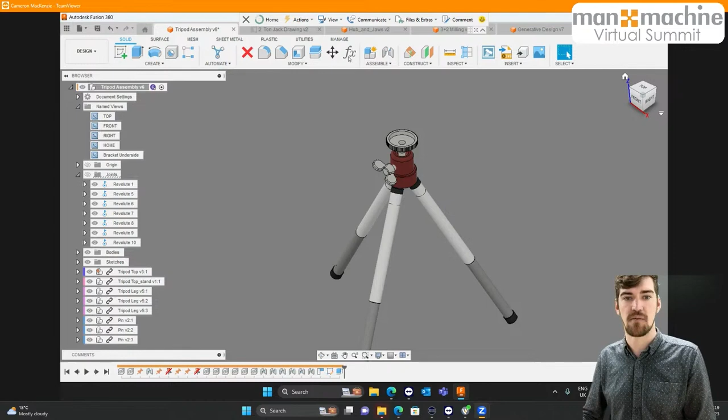We'll start off inside the main environment within our design environment. We've got a few really nice bits of functionality added in over the last few updates. The first one is inside our parameters—we now have the ability to defer updates. So we can basically create a whole lot of updates immediately without them being pushed through to the rest of our model. We've got the ability to change any parameters we might need to adjust, and then push those out as an update all at once at the end.

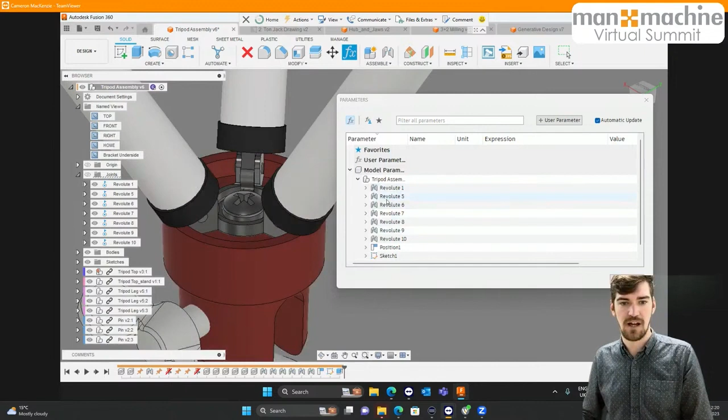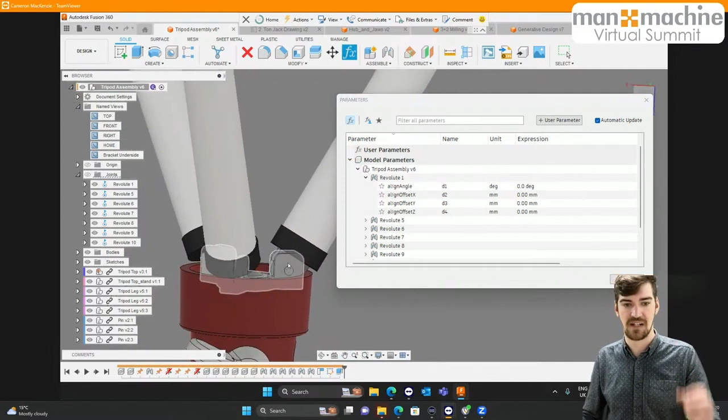So let me grab this window and show you—I'll go to another view and drag the model off to the side, and we'll look at the underside of this bracket over here. We've got a model with different parameters in this list, and we've got a revolute joint that I want to make an adjustment to, so we have an offset. If we're wanting to make adjustments going forward, we want to look at the geometry itself—we've established that in this model, these legs at the bottom and the way they're connected collide with the main frame itself. So we've got the ability to make adjustments to either the angle offset or the X, Y, and Z offset from inside the parameters itself.

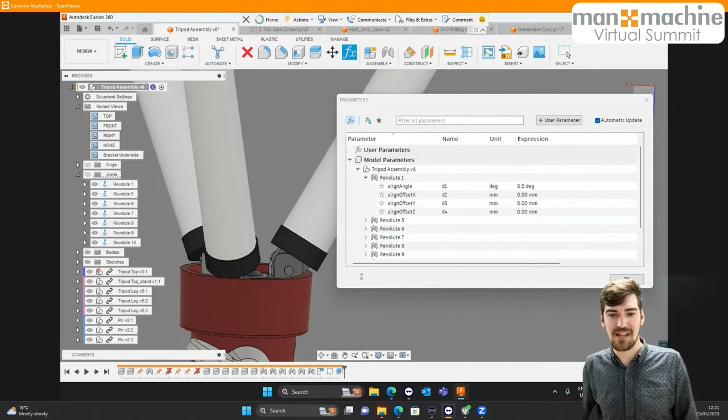Let me just adjust the table so you can see me a bit better. So we've got a Z offset that we have the ability to adjust from inside the parameters table over here. And as I say, we've got the ability to adjust these parameters without it automatically updating inside the model. So if I deselect automatic update from the table and make the adjustment to our parameter, I can come in and say I want a -7mm offset on the Z offset of that alignment. Now you can see as soon as I've hit enter, nothing has changed.

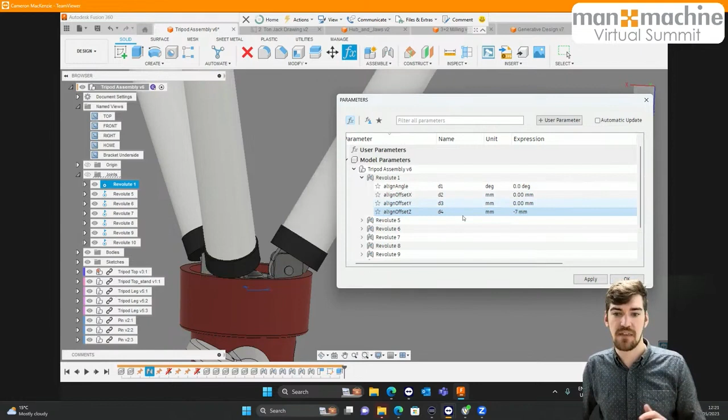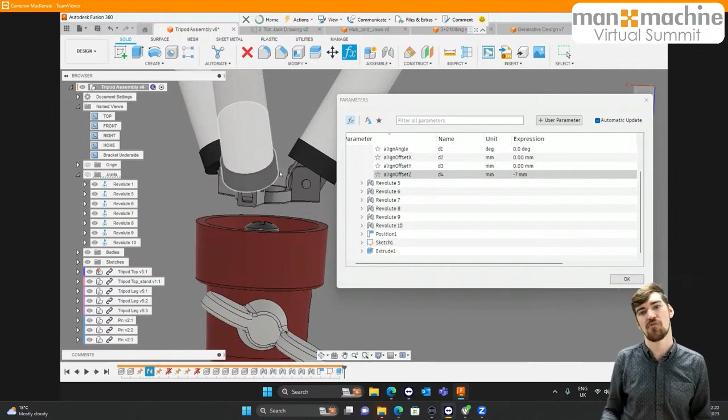I could go in and make any adjustments to any other positioning, any other parameters inside the model itself, and only once I'm ready for those updates to occur will I then hit apply, and then those changes are being made—it will tell me they're being applied at this moment in time. And if I hit apply, you can see how that has now made that adjustment. So nothing too new with regards to parameters, but just the way we deal with them and how they automatically update inside the model space, which is great when you have a few conflicting parameters that have been difficult to adjust previously. We've now got the ability to defer those.

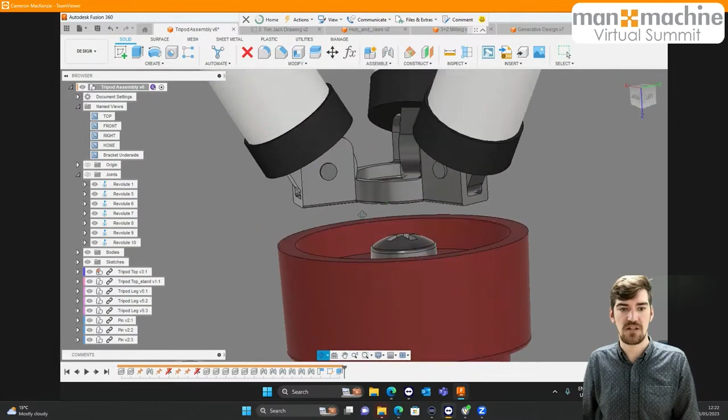I'll hit OK on there now, that's the only thing I need to do inside of the parameters itself. Today I just want to have a look at one of the other really great tools that have been introduced over the last while.

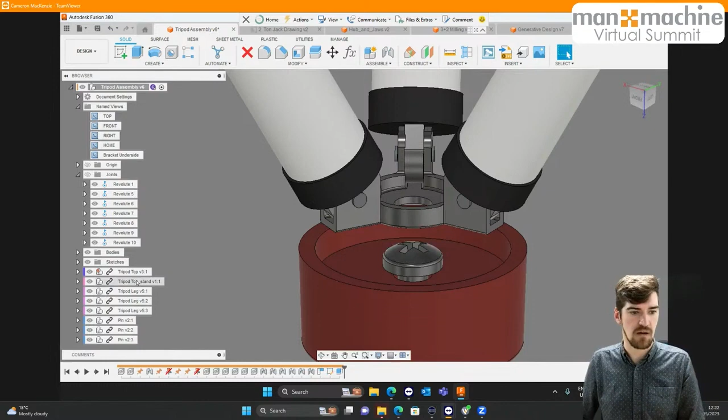So what I want to do is just readjust now. We've repositioned these legs to where they would need to be. I just need to go and remove the visibility of the existing stand in there. We've got a few components that we want to be connected to in one of these tripod legs. I think it was this one here, let me just double check. We've got a pin which is in here.

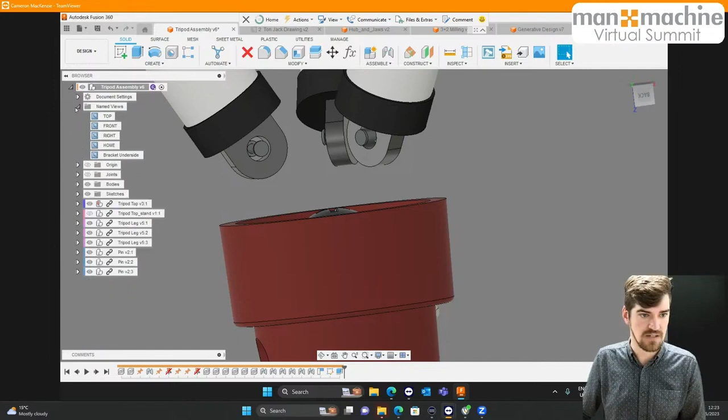Let me just push these away ever so slightly so I can see the screen a bit better. We've got a base down here at the bottom that we're wanting to connect our part to. So in this tripod over here, I'm just going to enable the visibility of these two rings that I want to connect to. I've just done that inside of their models themselves, just for the ease of use on that one.

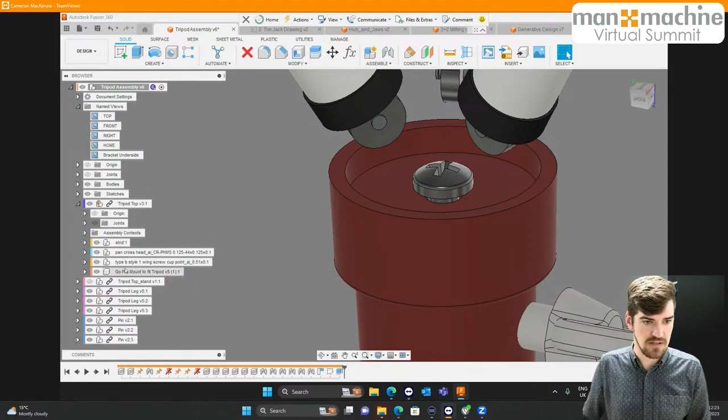Then within my current active model, this one over here, I should have a part, not in there apparently, in one of the other subcomponents I should have a leg. Doesn't matter too much for the sake of this one, I don't have it there, it's fine. I'll just create a quick sketch on here and just generate a new model from there.

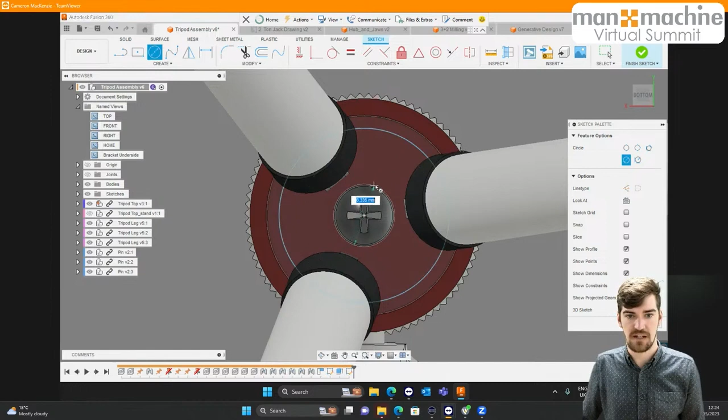So wanting to connect just this one leg, we will then create a pattern of it around the rest of the component. So just wanted to connect that leg to the base over here. I can come in and quickly create a sketch, something like that, and something like that, maybe a little bit smaller on there. Normally I'd try to be precise, but in this case I'll just go and create a line, something like that.

And another one like that, and just create an angle between these two. I didn't want a horizontal constraint on there, let me delete that very quickly.

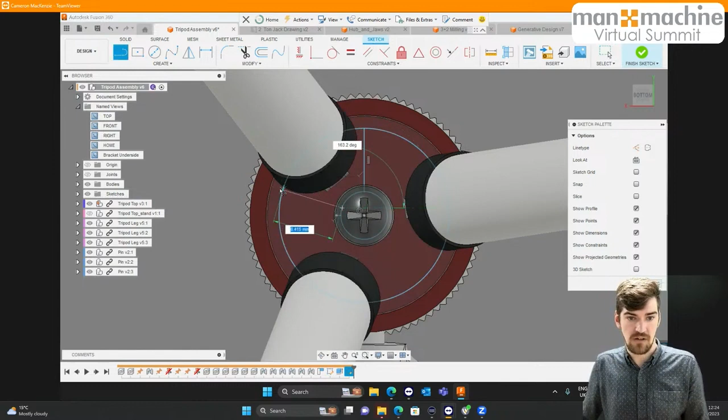And we can go and create a line, something like that, and dimension between those at 120 degrees. Or do we need 60 degrees? Let's go for 60 degrees on this one, something like that. We'll make it do as it is. So I'll hit finish sketch on there.

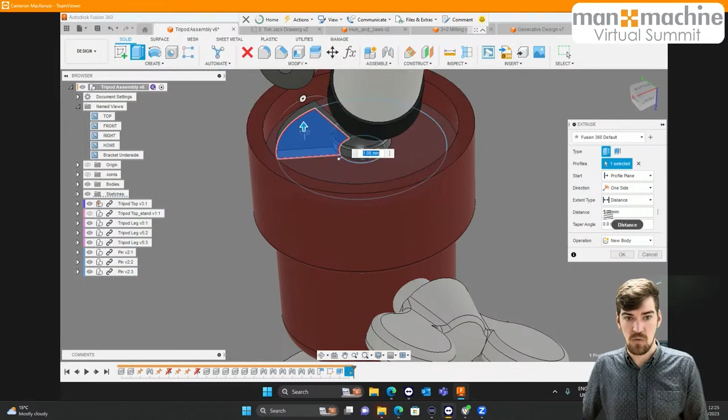Just extrude that out ever so slightly, I think I've got about a 1 mil extrusion on there, and I will create it as a new body on here. So basically we want to be able to connect the base that's connected to the bottom of the stand itself to the legs over here.

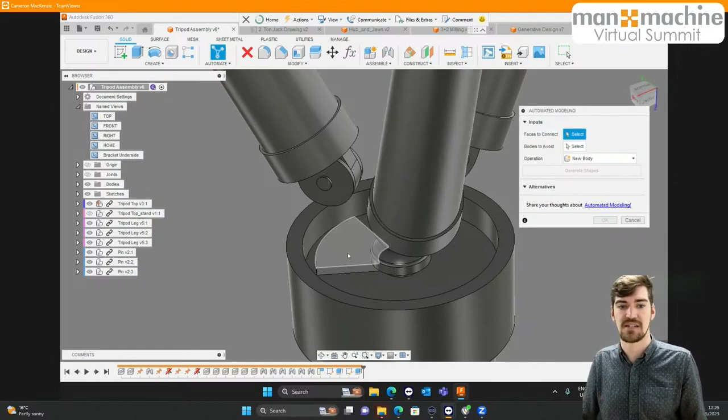Using automated modeling, we can essentially tell Fusion that we want to connect surfaces together, and Fusion can then generate the model that comes along with that. So as soon as I enter the automated modeling environment, I get a prompt to ask me which faces I'd like to connect. In this case, I'll go and grab the top face of that model that I just created on there.

I'll then also select the outside faces of the rings that I want to connect to my legs themselves as well. And then we've also got the ability to add in bodies that we want to avoid. So again, those of you familiar with generative design inside of Fusion 360 will be familiar with the options we have available here. But you can see it's really simple, we're just saying the areas that we want to connect and the ones that we want to avoid.

Once we've got that selected, we can then hit generate shape. This will then go off and start to generate those shapes for us. This will give us a max of about 6 alternatives that we can use, and those alternatives are then broken down into two subsets really.

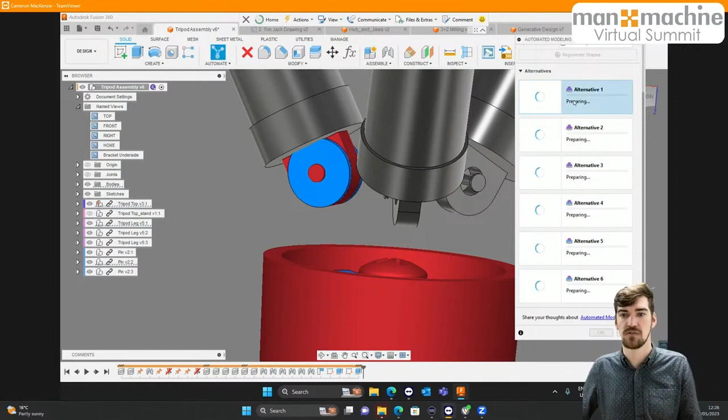We've got smooth connections, which are the first three, and we've got sharp or squarer connections, which are the bottom three. As they start to generate, you'll notice that alternatives 1 and 4, as well as 2 and 5, and then 3 and 6, work in much the same way and look similar in shape, but between the three groups we'll have very different shapes.

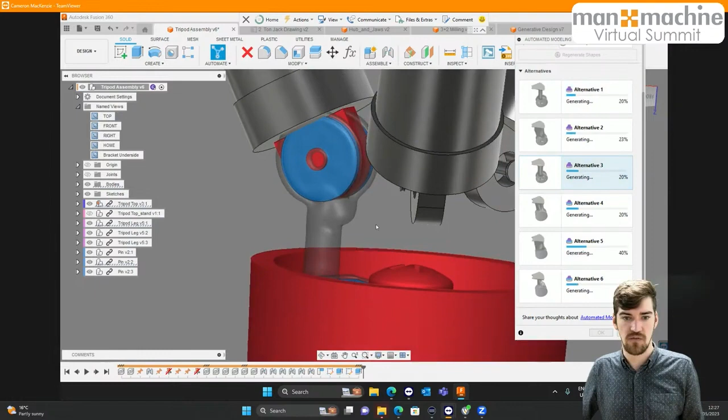Once these start generating, I'll give a preview. You can see alternative 3 has a very specific shape off to the side over there. If I look at alternative 6 in this case, it's got a similar shape.

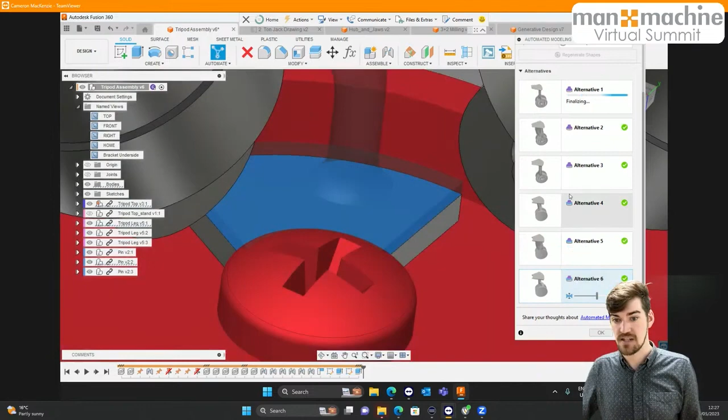But the main difference between these two is we've got sharper edges on alternative 6, with sharper corners, whereas alternative 3 has smoother blending into the original surface, the shape we chose from there. From here we can compare the different results we're getting.

So in this case I've got alternative 1, which actually looks quite similar to 4, but then I've also got alternative 2, and again alternative 5 will look very similar to alternative 2. Never thought I'd be saying alternative this many times this morning.

Afternoon already. The other option we have now, introduced fairly recently on top of the rest of the automated modeling, is the ability to adjust the thickness of the model itself. Using this little slider, we can make the material a little thicker or a little thinner, adjusting the slide from there.

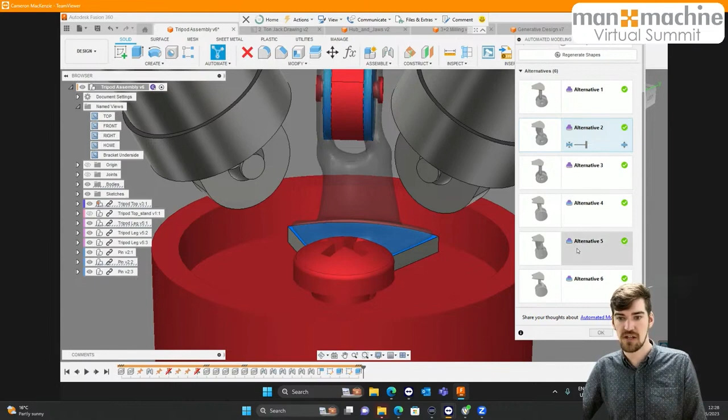Once we've decided on the one we want, it's just a case of hitting OK on the dialog box. I might want one with a sharper transition, especially if I'm trying to pattern these around - I'd want sharper edges on the side, just to make sure this is going in correctly.

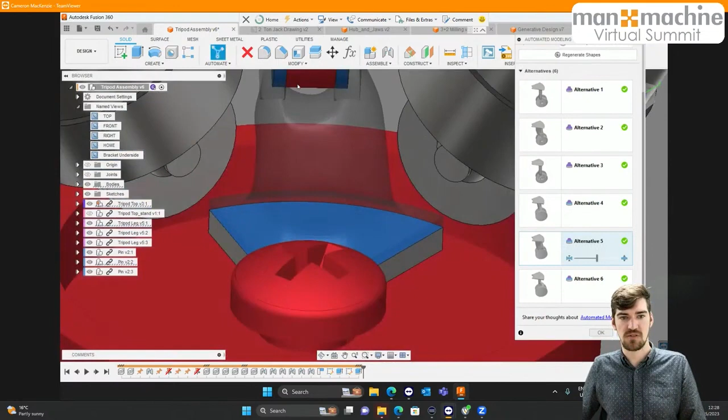One thing that's interesting to note here - I mentioned earlier I didn't get the model or the extrusion lined up in the greatest way. There isn't proper symmetry in how it connects to the bottom plate, and you'll notice the model has actually taken that into consideration. It's got more surface area on the right hand side to connect with, and that's why we got a bit of a lopsided model.

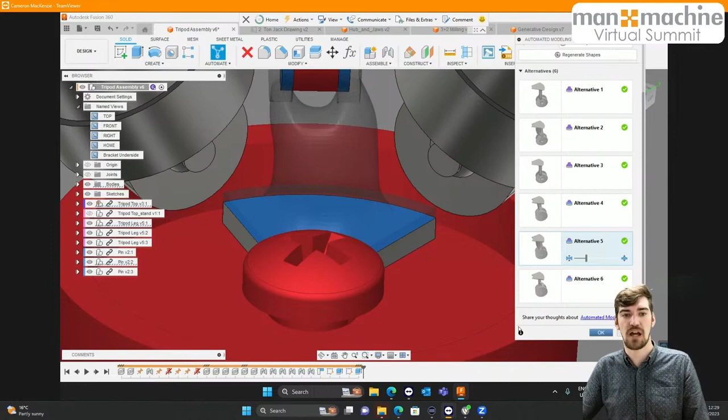But as soon as I'm happy with that and I've chosen the thickness I want for the component, I can hit OK. It'll then go and generate that as a 3D model that I can make adjustments to if I need to.

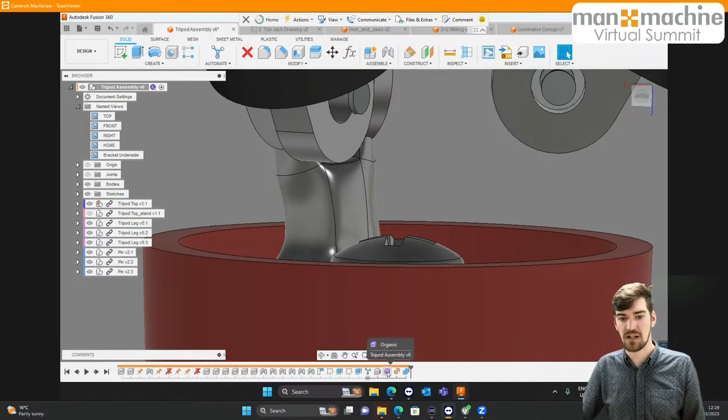So you can see we've now got this model perfectly made inside here, including the geometry that I told it to. We've now got that in the timeline at the bottom - the automated model feature that's been created, plus some preserves, and an organic model over here, which is basically a T-spline model.

I can go in at a later point once that's been created and edit that T-spline model. So if there are any features you wanted to tweak ever so slightly, any surfaces you might want to adjust, or regions you want thinner than others, we've got the ability to use our normal T-spline or form modeling to make those adjustments.

So if I double click on any of those edges, I can go and modify these, where I can then go in and grab the correct coordinate system. World space looks right, fine. I can then go in and scale that if I wanted to.

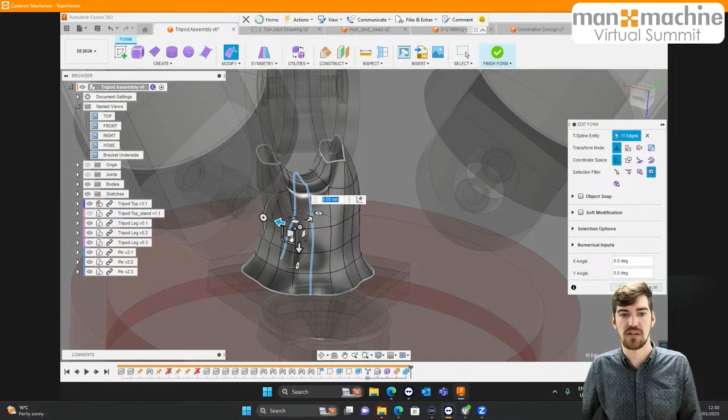I can move this around and adjust it to my heart's content. I can make certain areas a little bit smaller, maybe shift that down just to stretch the model a bit. I might want a little more of a gap along that region, so I can scale that down in just one region, maybe even from the beginning.

Any adjustments I make, as soon as I hit OK and go back into my 3D model, if I finish form here, that's then the adjustment to the model itself, to the actual feature itself.

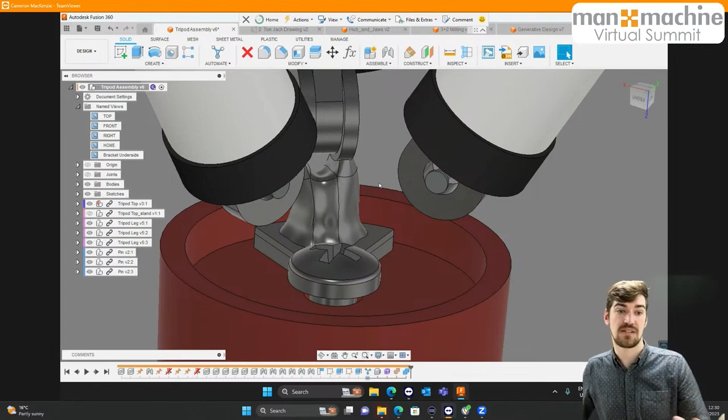So that's within the modeling environment or the design environment. The other updates we have are in the drawing environment. Fusion have done a lot of work in creating a lot more functionality inside of the drawing environment. We've seen a huge leap forward over the last 12 months, even the last 18 months or so, but there's been a really big jump in the last little while.

Some of the features we've got available now are the ability to copy an existing sheet across. So if we've done a lot of work on a particular drawing sheet but just need a few small things tweaked, we don't necessarily want to change the original one, but just want to make a few minor tweaks. It's a case of having multiple different clients that need different information, or different manufacturers that need little bits of information slightly different between them. So we've got the ability to right click on any of these sheets now and duplicate that sheet, and it's going to create an exact replica of the original one for us, where we can then adjust this to our heart's content and make any changes we want to our model.

Perhaps we don't necessarily need a full bill of materials on the model. We might want different views of the model, or just want to show a few separate components and change anything from there, but we want to keep the main feel of the drawing exactly the same and have them a little bit more identical in that regard.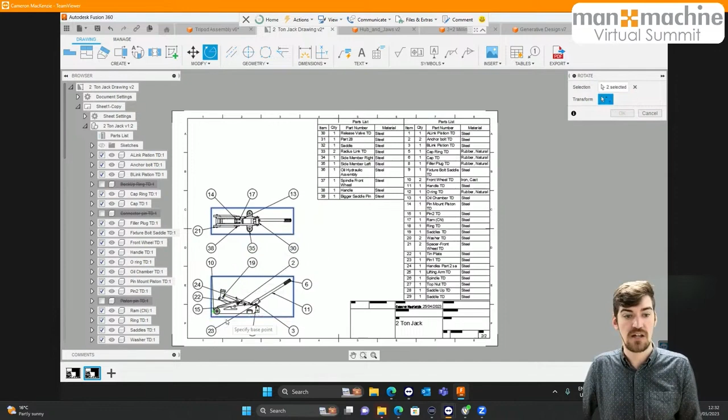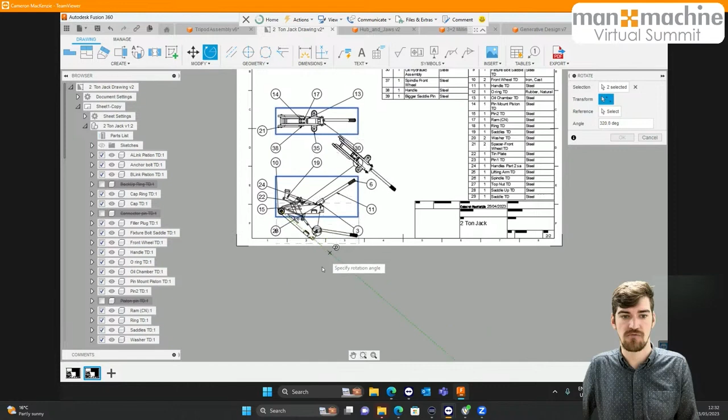I'll go back to the original one, and this is probably one of the biggest changes they've made inside of the drawing environment. I think they released it towards the end of last year, the November or December update, and that is the adjustments to the document settings. So inside of document settings, we used to have a few options, I think 3 or 4 options in the way we could configure the document as a whole. But that setting has gone through a complete overhaul.

So now if we go over the document settings in our window and grab onto the little cog to change the document settings, we get an entire window of different settings we can actually adjust inside of this particular document, including the font we're using, the text group, the text height, so whether we're using small, medium, large or custom. You'll notice as soon as I choose between any of those, the smallest text height then changes, and so do all of them incrementally adjust.

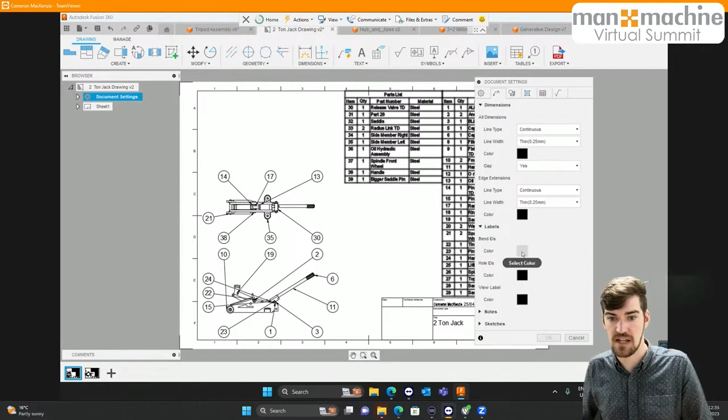On setting those colors, we then have the ability to choose any color that we want for any of the features, so whether we want to really highlight a particular feature or dimension inside of our drawing. For example, if I go and find labels - it's down in the table setup - we've got the ability to change the balloon color. So if I wanted a really bright pinkish color, I've got the ability to set that on my drawing. As soon as I hit OK, those will update inside of the drawing view.

But what happens if we've got a whole lot of other drawings that we've already done all the work to? What happens if we want to create a template for this? This color configuration can be set inside of the template file itself in your drawing templates. But Fusion has also allowed us to grab those settings and bring them in from a template file as well.

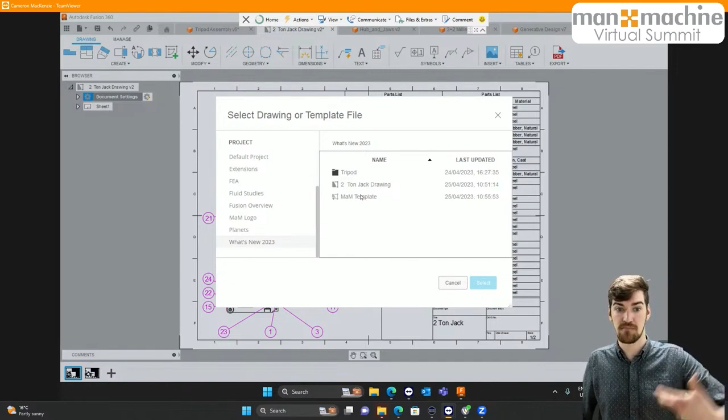If I right click on my document settings, I can actually go and import document settings, meaning that any drawing I've configured and done all the hard work in setting up, making sure all my color schemes are correct and everything is nicely configured, I can grab that from my data set. Here I've got a man and machine template. I can select that, and as soon as that updates, I hit OK. Now it's gone in and changed all of those settings in the document settings. As soon as I hit OK, I can push all of those settings onto this document.

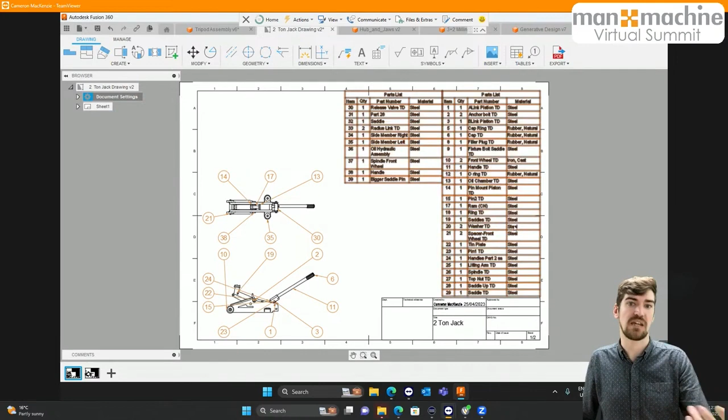So any existing drawings we have, we can import those settings onto this particular document. And then going forward, we're only using the man and machine template to make sure we're keeping up to our company standard along the way.

And then the last update in the drawing environment that I'm really excited about, released in the last release or the one before, is we've got the ability now to use automatic hole center marks as well as center lines. We can do that from inside of the view itself, when we place our view down or when we're editing a view.

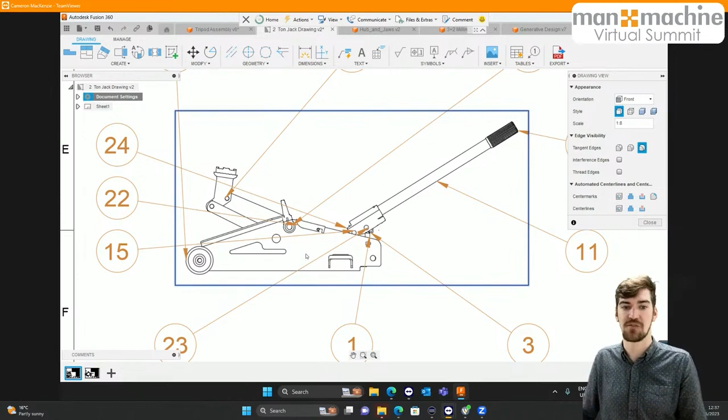If I just double click on the view itself, we've got the ability to go and grab center marks and center lines based on the type of geometry that was used to create that particular feature in the view. So it's going to look throughout our entire view and automatically populate the center marks or center lines based on the type of geometry we've created.

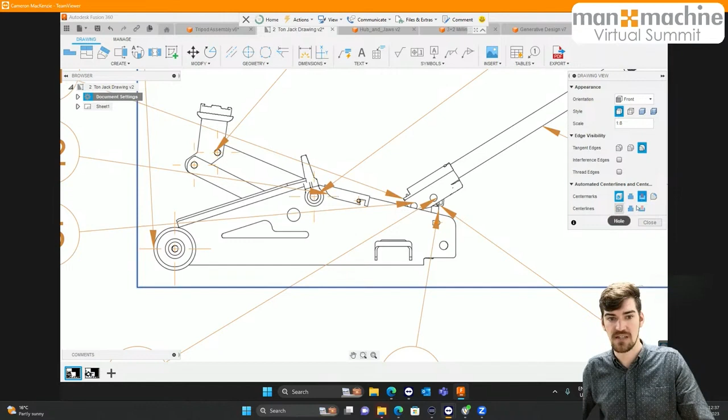So in this regard, I could go and grab center marks for any hole created in this model. In this case there aren't any holes - I believe these were all created using cuts. So as soon as I filter by cuts, we automatically go in and mark all of those center marks out. If we had any corner rounds, we could add those in, and any fillets, we could also add center marks to. When using those, we've got the ability to choose a minimum fillet radius and a maximum fillet radius, so we can filter those down really nicely.

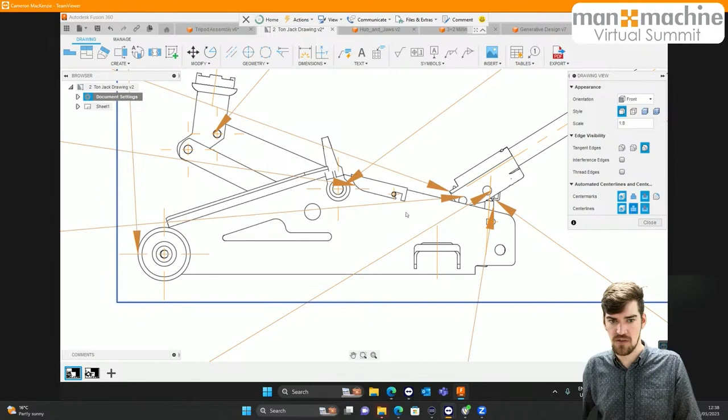We've also got the ability to grab center lines. So if we have any holes cut perpendicular to our view - in this case I don't think I had any on this particular model from this angle, but if I grab it from the other view, let me close this one down and edit this one - you can see as soon as I go and grab either from holes, extruded shapes, or cuts, we've got the ability to automatically mark those center marks in there. And again, those center lines and center marks are grabbing the new color and new configurations we've got inside of the drawing environment.

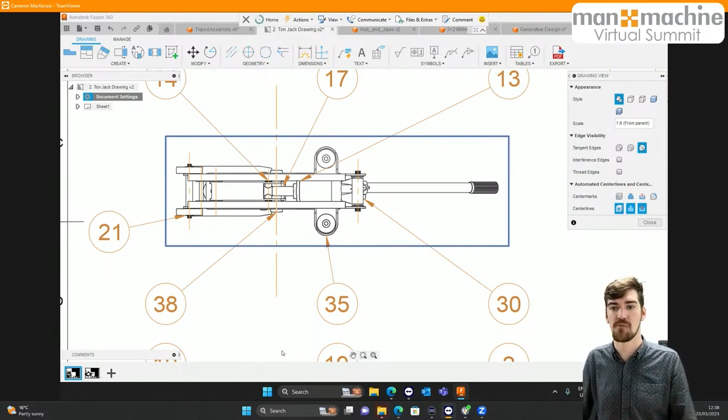So really exciting functionality being added into the drawing environment, and really starting down this line of automatic drawings and being able to get a lot of information out there without having to manually go and add all of that information in all at once.

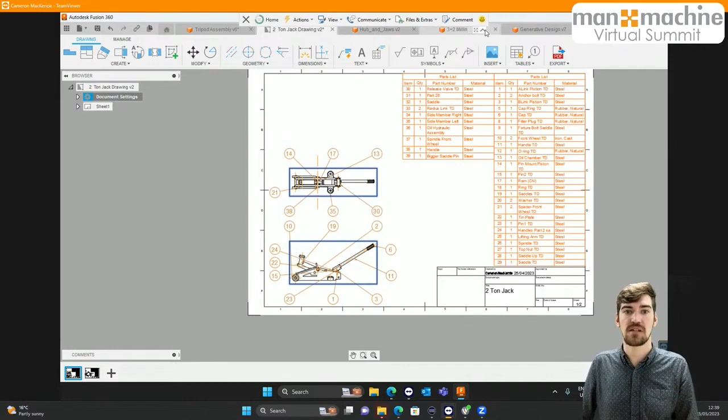Moving on from the drawing environment, we then have some of the updates that have occurred inside of the manufacturing environment. So the biggest one for me is the changes they've made to the selection of features inside of the manufacturing environment. For those of you that are in manufacturing quite frequently, you've probably noticed those changes already.

Those of you that have tried it a few times might have found selecting certain features for certain toolpaths and strategies a little time consuming and tricky at points. You might find one strategy has a great method of picking up holes, whereas the strategy you need is really tricky to get that functionality. So what the team at Fusion have done is give us, in any single strategy, the exact same selection options available.

So whether I'm using 2D strategies, 3D strategies, drilling, multi-axis, any functionality I might want to use, if I go into my geometry tab when adding these toolpaths in, we've got a whole new revamped geometry section over here. Inside of this, we've now got the ability to use any of the selection options across any of the strategies, so whether we're using chain selection to grab any of the edges, you can see how it's automatically only looking for chains on this particular one.

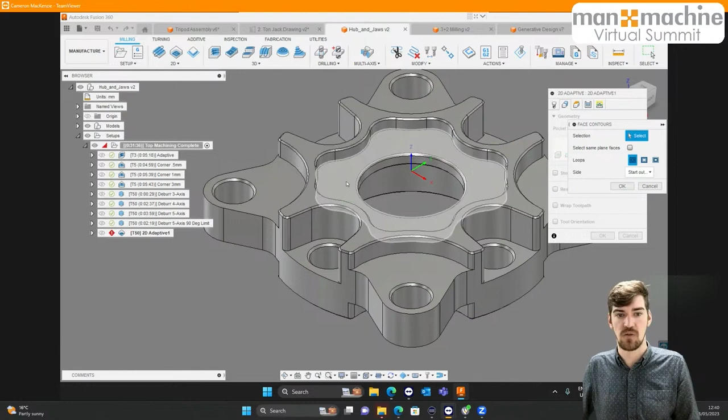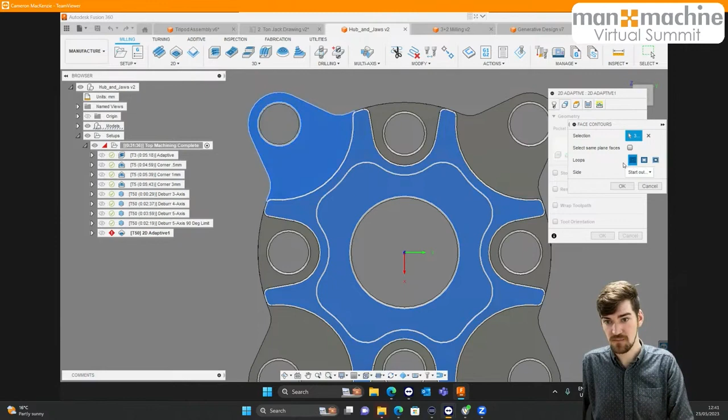By combining our selections, if I look at this from the top, we can decide whether the loop we are selecting is going around the outer perimeter only, as is the case over here. So we're only looking for outer loops, or only inner loops, or a combination of the two. We've also got the ability to use the option here to select same plane faces.

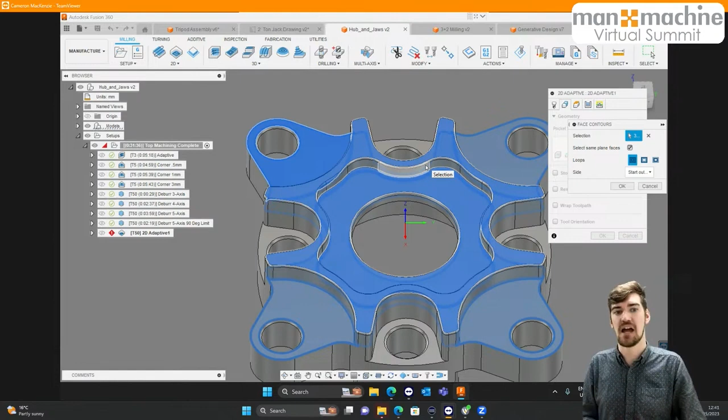So if we've selected a face over here on this plane, if I tick that now, it should go and select all other faces that are on the exact same plane, which makes the selection process so much easier if you're grabbing a whole lot of pockets that aren't necessarily connected, and you just want to pick everything at the exact same height. It makes that function a lot quicker and easier along the way.

There are a few more options, including pocket selection and pocket recognition, which is great, where we can set limitations in the pockets we're looking for, and Fusion will automatically go and look for those particular pockets to our heart's content.

The last few options are silhouette, so it'll go and grab the entire silhouette of your component. This is great for contouring and anything you're needing to trace along edges for. We can set limitations on the silhouette itself, but automatically it'll go and grab the silhouette of our component based on our orientation, based on the direction of the Z axes.

So this is really a great advancement to the selection options that they've added in there. The last one is the ability to grab from sketch profiles, which we've had before, but we've now got this across every single strategy, which just makes selecting the exact bit of material, the exact portion of the model, that much easier and better going forward.

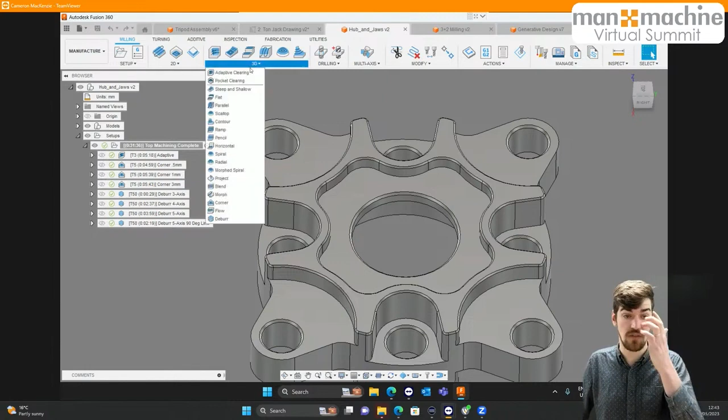Now, some of the other additions are part of the manufacturing extension. This is an extension to Fusion 360, an add-on that you would have to purchase a license for or use credits for in the extension manager. Those options are available inside our multi-axis, or in this case, inside our 3D milling, and those are the deburring and cornering functionalities.

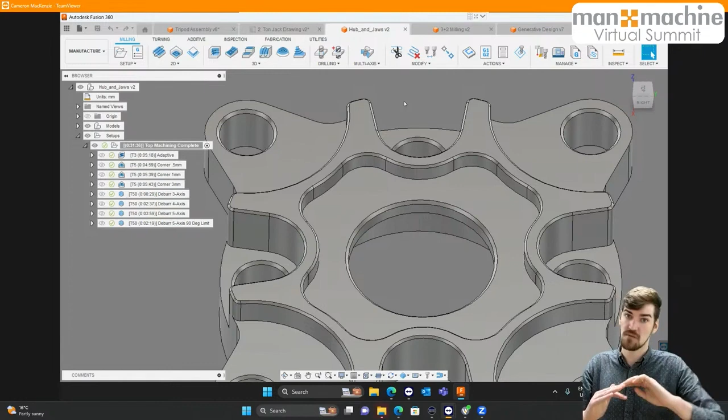They're both pretty much opposite to each other. Deburring will go and machine along any sharp corners where you might have left a little bit of material, a little bit of sharp edges that might be missed by going over with different tools. Essentially it'll take into consideration any previous strategies, and then use the rest machining capabilities inside of Fusion 360 just to identify where some of the edges might be located. The other option is then cornering.

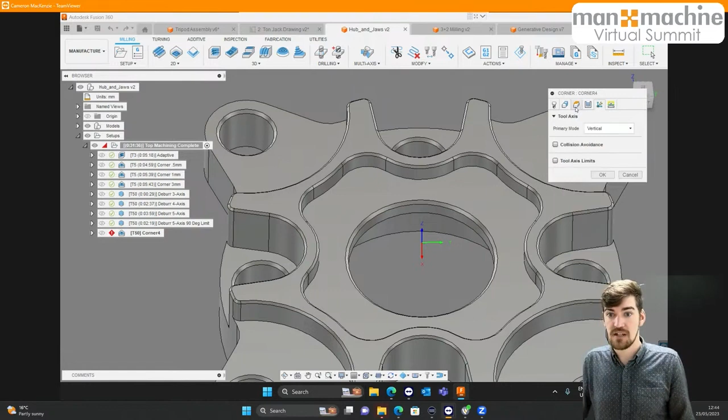So again, with cornering, we've got the ability to go and open that up. In the strategy itself, we essentially want to go and choose the... let me just see in here.

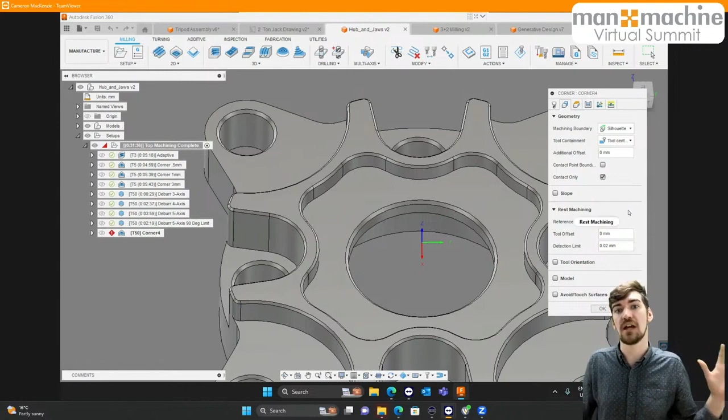In the rest machining section, we can reference another tool. So any tool that's been used previously, we can say that particular tool might have been a bit too large to go into certain corners. So we want to use this corner strategy to go into any of the sharper, tighter corners that the larger tool wouldn't have been able to reach.

I've gone and created those strategies here, and we've got the ability to set certain limitations on the offset. So based on the size of the tool, we then tackle pockets that might be a little larger or a little smaller than that.

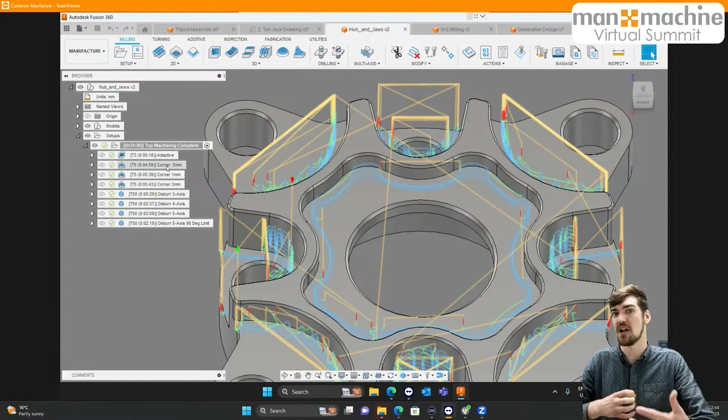If I view this from the top, and go for a 0.5 mil offset, it just tackles the areas and leaves about a 0.5 mil offset along the contours themselves. If I go for a 1 mil offset, it extends it a little bit larger, giving a bit more offset along the side.

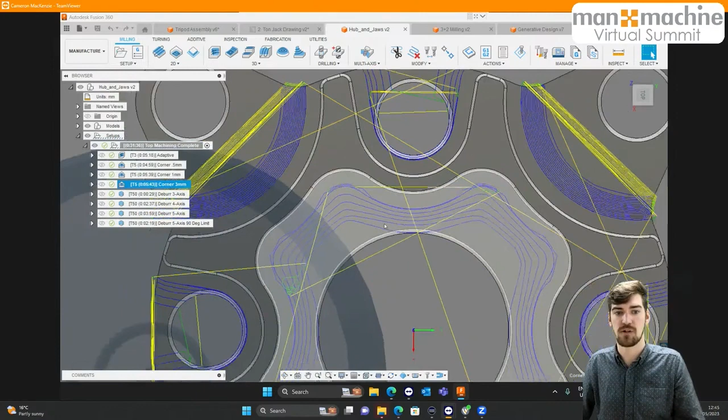And then if we go for a 3 mil offset, you can see how it gradually goes out from the outside and in towards the pocket itself. So we're accounting for the cornering of the larger tool, leaving a bit more material behind, and going in with a slightly bigger tool path along the way.

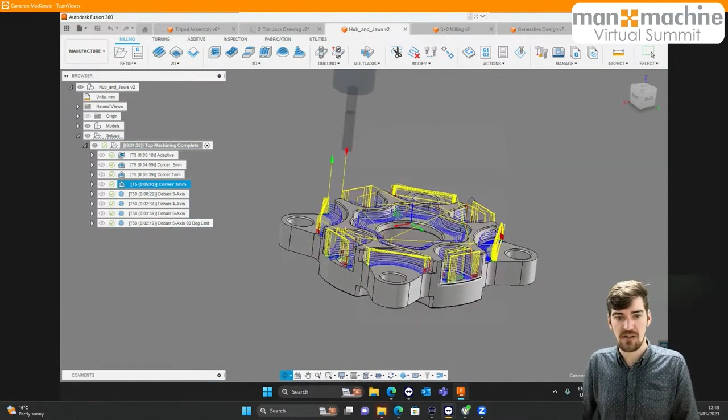On the opposite end of that spectrum, if we have a look at the deburring option, which is going to tackle any external sharp corners, anything along the top of ridges, we can go and look at the different strategies that occur with that one. That one's got the ability to use 3, 4, and 5 axis strategies.

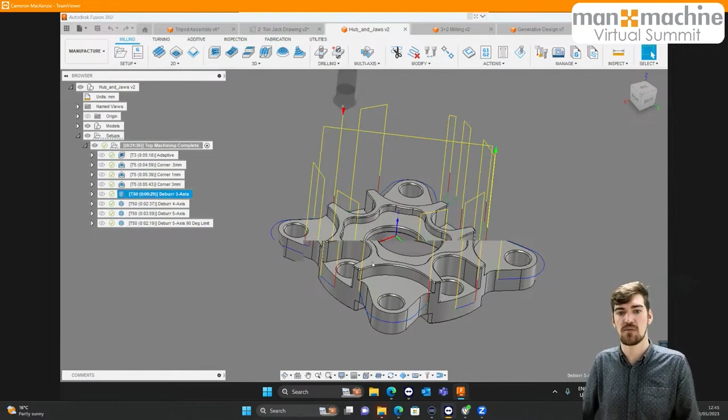If we just use a 3-axis strategy, you'd see we come in from the Z direction straight down into the component, or we could alter that. We can choose the direction we're machining from, but this will essentially go in and look at any surfaces, corners, or edges that are available for machining along that particular part.

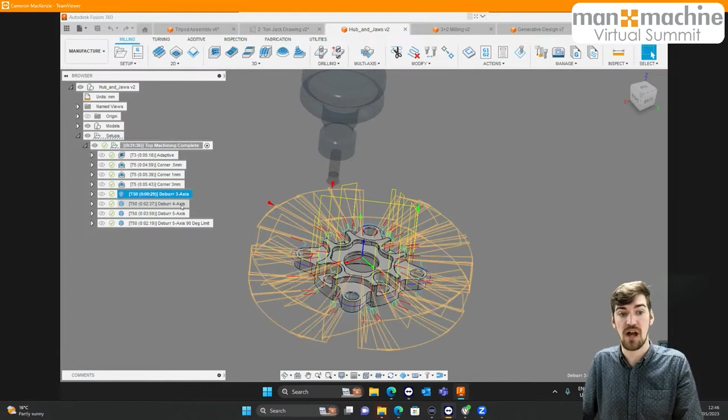If we then go and add some 4-axis strategies, that's going to use a rotational axis, so we can move around the part following the rotation of a single axis, while still using the rest of the axes for movement.

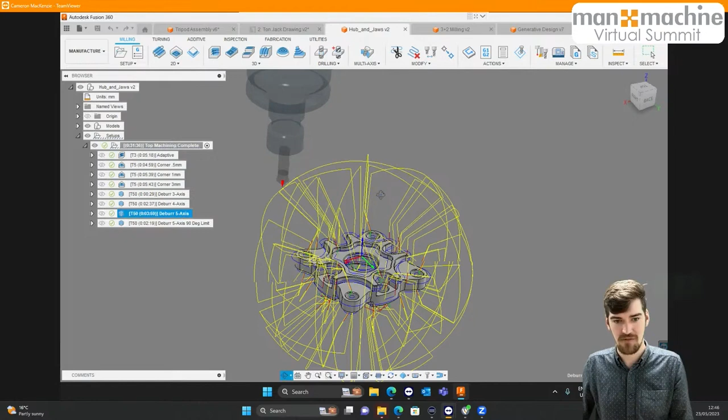The last one is a 5-axis one, which looks really impressive, but not the most realistic in the way that it works, though it still looks amazing when you have a look at it. This is if we've got full 360-degree rotation in all axes, and we're able to tackle our component from all angles.

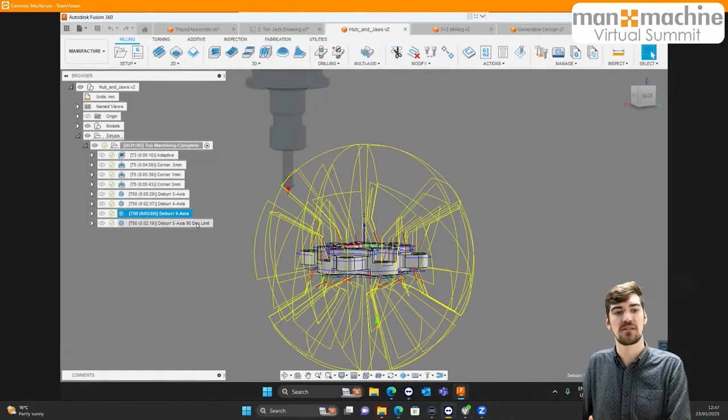But with those, we can start to limit the areas of attack, limit the angle of rotation and capabilities of the machine itself, within the configuration. So if I grab that 90-degree limitation, I've set an angle limitation of 90 degrees, so it knows it can only go 90 degrees from the primary axes, and you can see how it's able to tackle the material from those different angles.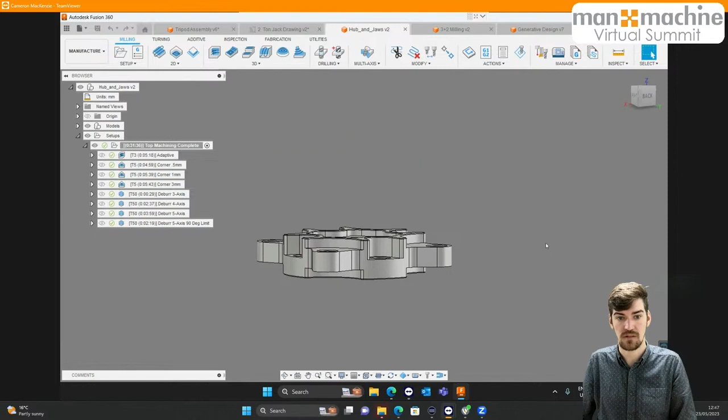The last thing I want to show you inside the manufacturing environment is the ability we now have for inclined flats. Let me open this one up quickly and go into my manufacturing environment - for some reason I was in the design environment. This is a sample file from the Fusion team.

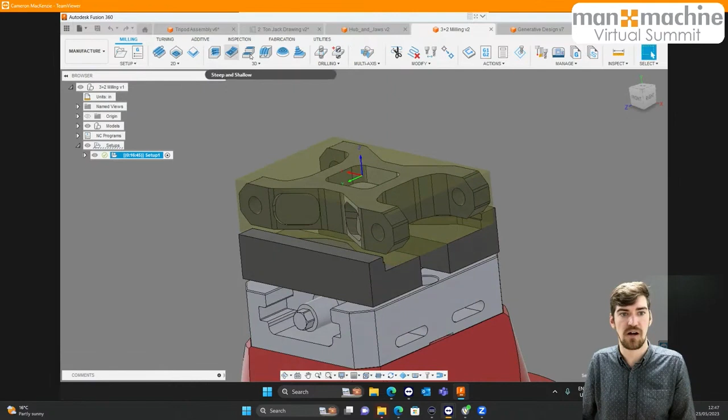Previously with our flat toolpath, if I grab it from the 3D strategies panel, we've had the ability to attack any surface that is flat, and predominantly this has been any surface that is horizontal. But we've also had a horizontal toolpath, and the two work in a similar way, though they use a different method of tackling that particular surface.

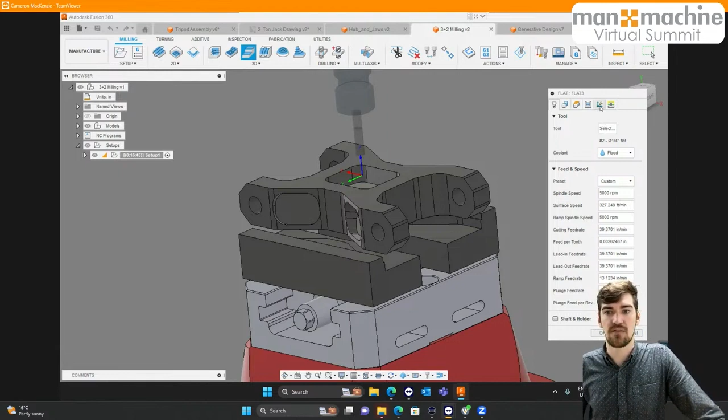Now what we have the ability to do inside one of the latest updates is in the multi-axis options. Again, this is a manufacturing extension - anything working in 4 and 5 axis manufacturing inside Fusion 360 is part of the manufacturing extension.

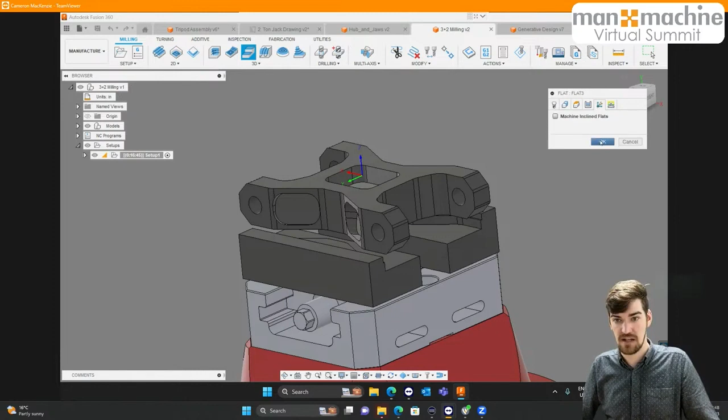We've got the ability to machine inclined flats as well. So if I generate this quickly without that enabled and just hit OK, you'll see how it will go in and generate a toolpath that is just on that top face, and anything that is normal to the Z axis in this case.

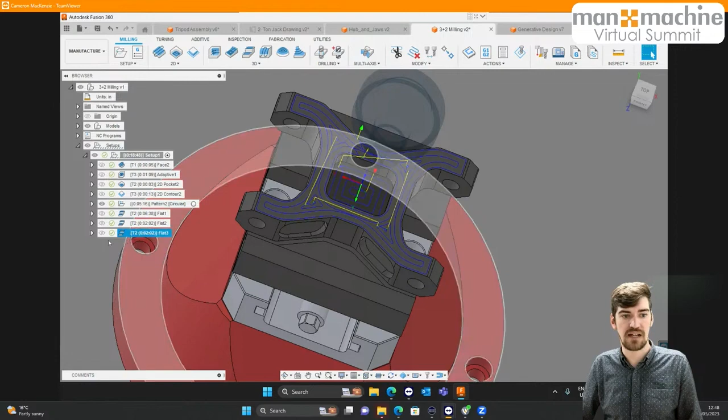However, if I go and use the exact same strategy but enable the inclined flats on this particular one, let me just edit this very quickly. So there's a little bit of a lag here.

If I hit machine inclined flats and set a minimum and maximum tilt angle, if I bump this up all the way to 90 and hit OK, this will then go and generate and think about the different surfaces it's able to attack at different angles.

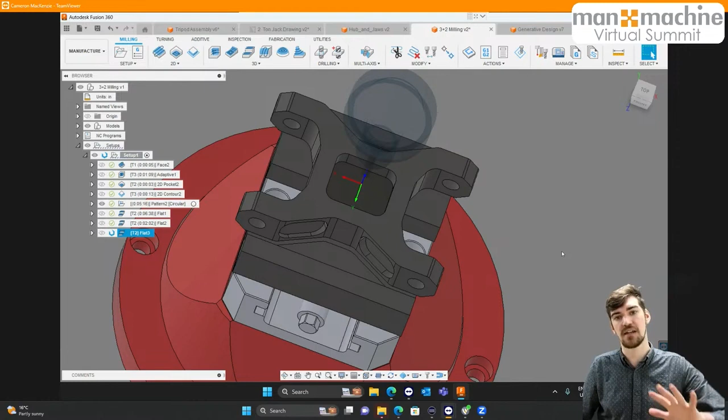As soon as I've got that set up, it does take a little longer than the other options. But once it has generated, you'll see how it's then able to calculate the tool paths on the different surfaces around the side of the component as well. As soon as I've made that adjustment, we can set the limitation ourselves.

So if you'd prefer a 60-degree angle or a 70-degree angle as a limitation, well, this is very slow. Let me just pan back up so we can see that a bit better, and you can use your imagination around the rest of the part. But you can see how it's able to tackle each of the individual pockets and surfaces along the way.

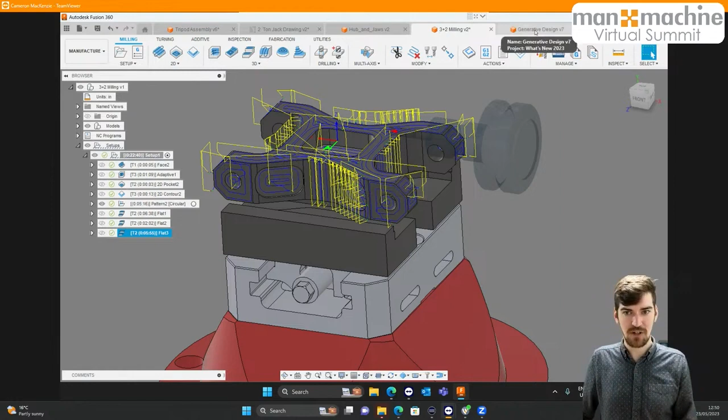Awesome, I'm running out of time, so I'm going to quickly move on to the generative design. Not the generative design - yes, generative design. It's the generative design study environment.

Some of the new options they've given us inside generative design enable us to make the models a little bit more controllable. We've got more options when it comes to creating the studies, and more control as to the outcomes of the studies inside generative design as a whole.

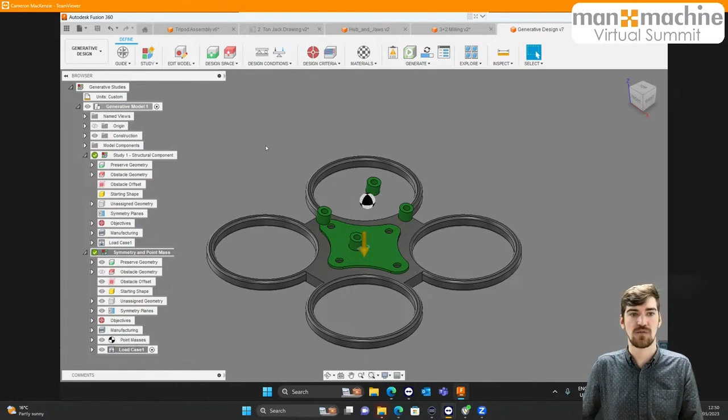The two new features they've added to the functionality are, first of all, the ability to add a point mass into our study environment. Previously, you would have to go in and add loads onto the individual surfaces inside your study.

We would pick the surfaces that our load is being applied to, and if it's multiple different surfaces, we'd have to guess how much of the load is applied to each of those surfaces and presume that the center of gravity is right in the middle of all of those components. Now, inside our design conditions, we've got the ability to set in a point mass.

We can add this little point mass in here, and we can say how much this point mass weighs and where the center of gravity of this particular component is located inside our entire environment. Rather than having to go and try to...

guesstimate exactly how much of the load will be on the back or front of the component and how it's distributed around, all we need to do is find the center of gravity of our model that will need to sit on top of that, or the part that needs to sit on top of that. And then we can move that around in three-dimensional space.

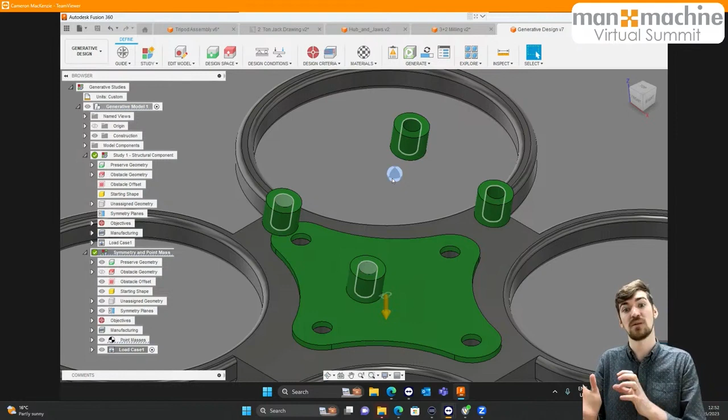So if I double click here, you'll see easily enough I can just use the different control nodes to adjust the center of gravity of the component as and where we need to, and then set how much that particular component weighs. Once we've got that configured, we can add that to our study, and Fusion will do...

the rest in the generative design interface, and we can then make sure that our components are a bit more rigid, and the center of gravity can be a little bit further away from the center of all of those selections. The other option we have as well is the ability to assign symmetry planes.

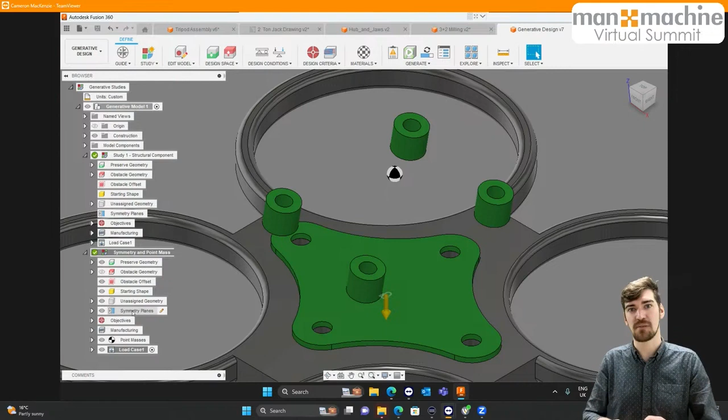Generative design - that's a mouthful - as it is, the results we get out of it are really organic. So up until now we haven't had much control as to which components look symmetrical or identical to each other. But we've got the ability now with the symmetry option to ensure we've got a line of symmetry, so two items will look a little bit more aesthetically pleasing on either side of that symmetry plane.

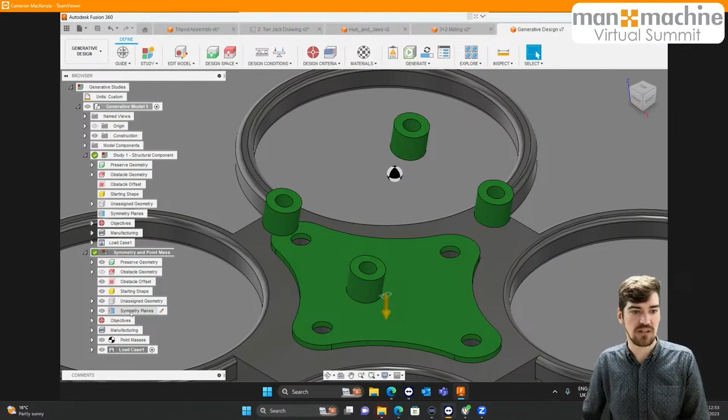And we've got the ability to choose which planes we're using along that. I'll go into the results really quickly and show you the differences we get. If I deselect the one with those two options selected, a very simple model, the results we get here aren't quite exactly what we're expecting.

If I open this one up and look at it from the top very quickly... once it decides to load, it was loading fine a few minutes ago. It doesn't seem to want to do it. Let me try this one over here, and not so much either.

Fine. If I open up the symmetry and point mass over here, you'll see we've got study 1 in both of these two outcomes. Let's have a look here. We've got outcome 2 in the structural component, and outcome 2 in the symmetry and point mass. You'll notice that because we've got that point mass between the components, Fusion knows that mass in between is going to push the handles a little bit further out, so it's got a bit more structural integrity in regards to the placement of the material.

If I can open this one up nicely... annoyingly, nothing. Let me change the model view and see if it's going to give me anything. It doesn't want to give me anything. That's fine.

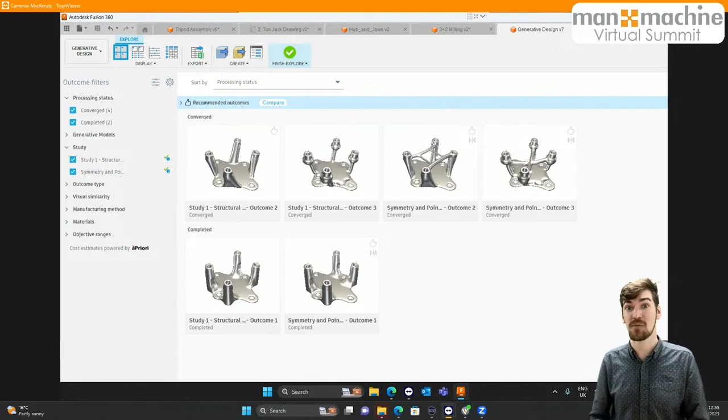Thank you, Cameron, for an excellent presentation. As you can see, we have an abundance of new additions to the Fusion license this year, so I think he did a really good job taking us through them all in such great detail in such a short amount of time. But something I wanted to point out is I'm particularly excited and impressed by Autodesk's ability to take on feedback from their actual user base, especially when it comes to the machining side of things.

I think a lot of the changes to things like deburr and adaptive clearing are something I've heard in conversation with some of our clients, and you can see they've really taken that on board with the new changes they've made this year.

I also think it's worth noting how many of the features are included within your base Fusion license, which is already within your product design manufacturing collection. You can pick that up and use it as soon as our presentation ends today - things like inclined flats, features such as parameter auto update. I think it's quite exciting that that's a capability you can just pick up and use without having to look into any of the extensions for now.

I also, just before I go, wanted to put a spotlight on the editing and documentation changes, since although they are a little less exciting and fun to demonstrate than some of the other features, I think when speaking with some of my customers, not being able to standardize some of their documentation might be what held them back from rolling Fusion out as their CAD solution within the drawing office. So I think that might give Fusion a bit more adaptability for a greater client base.